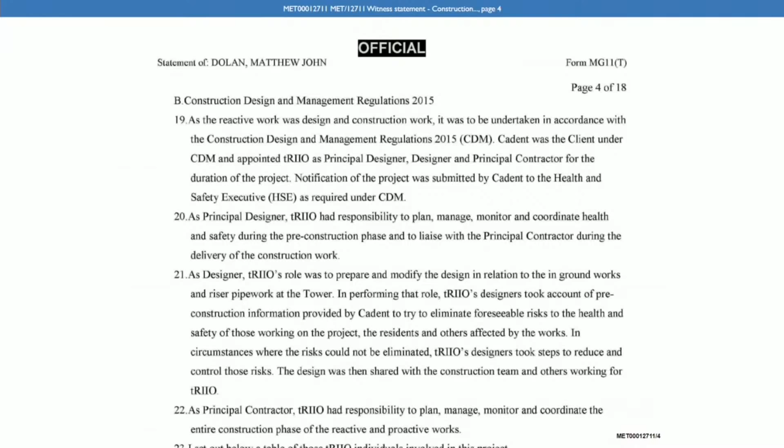So we know that the roles of principal designer and then designer, they're separate roles under the CDM regime, aren't they? Yes, they are. And the role of CDM designer is also distinct from any design role in the sense of having a contractual obligation to design. Is that correct? It is, yeah.

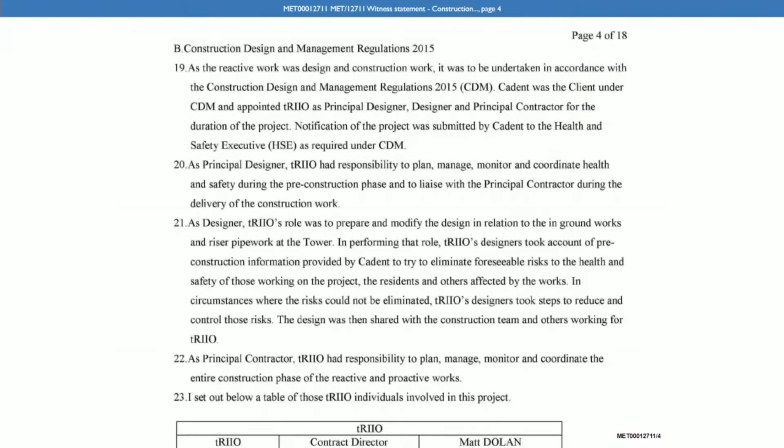And for the Grenfell project, Triio was both CDM designer as well as having the primary contractual role in designing the works under the contract with Cadent, yes? That's correct. And then, looking again at your first statement, paragraph 22, you tell us there that as principal contractor this time, Triio had responsibility to plan, manage, monitor and coordinate the entire construction phase of the reactive and proactive works. Is that correct? Yes, thank you.

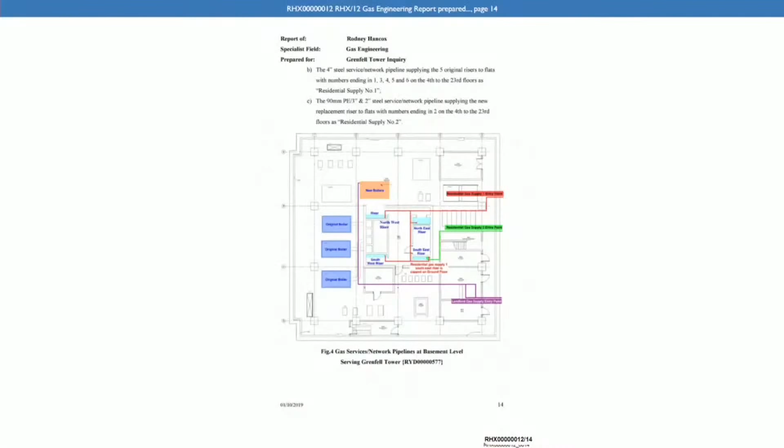Now, moving on to consider the gas installations at Grenfell Tower itself. We asked Mr. Harrison about the 3 different gas supplies into the tower yesterday, but I just want to confirm your understanding of those. If we go to RHX00000012 at page 14, this is figure 4 from Mr. Hancox's expert report, and it shows the 3 different gas supplies into the tower. At the bottom, we see in purple the landlord supply, which we understand feeds the boilers.

Now, it's right that Triio had nothing to do with that gas supply, did it? That's correct. And then we can see in red at the top, on the right-hand side, residential supply 1. Now, this was the original gas supply to the flats installed when Grenfell Tower was built. Is that correct? Yes. And we can see, if we follow the red line, that it comes into the basement and then divides into 4 risers, 1 for each of the 4 corners of the building.

Do you see that? I do. And was that your understanding at the time? Yes. And as it goes up, two of those risers split into two, so there are in fact six pipes going up, one into each of the six flats on each floor.

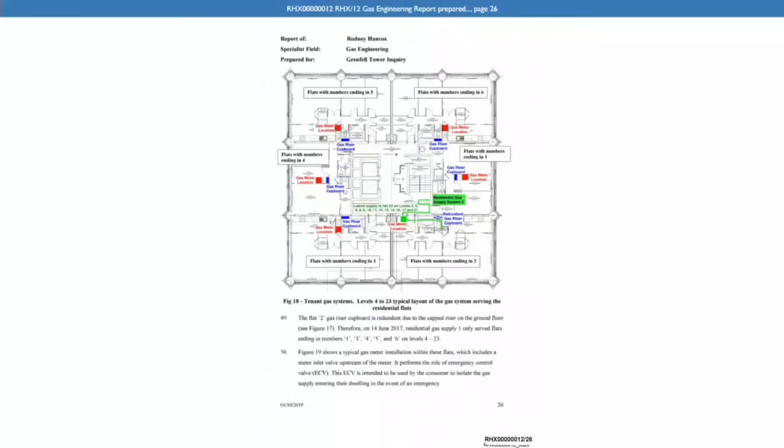Is that correct? That is correct. If we go to page 26 and look at figure 18, this is a typical floor plan at Grenfell Tower between levels 4 and 23. We can see in blue where the original gas riser cupboards were for residential supply 1. Do you see those? I do. Is it right that's where the meter was and the pipes would come from there to the gas appliances, the cookers? Yeah, so the riser would go up through the riser utility shaft into the flat, into the riser cupboard where the meter was.

Did Triio have anything to do with the work on residential supply 1? No.

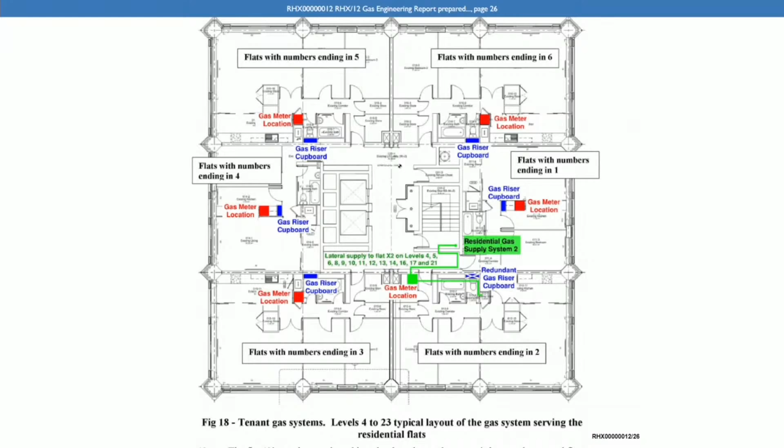If we go back to page 14 and look at figure 4 of Mr. Hancox's report, we see in the middle of the page on the right-hand side, with the green label and the green line, something called residential gas supply 2. That was the new gas supply riser that Triio installed in 2016 and 2017. Is that correct? It is. If we follow the green line, we can see it also comes into the basement and then comes to the southeast corner of the building. Is that correct? That's correct. From there, is it right that it rises up through the building, through the stairwell, and then into the lobbies and into the flats? Yes. We'll come to more detail about that shortly.

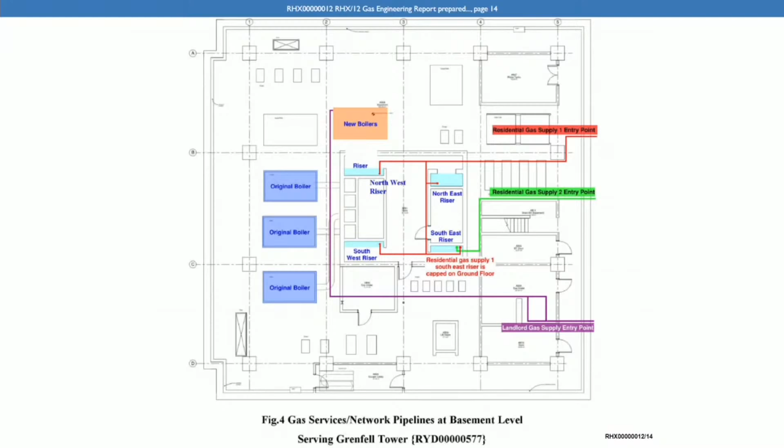In terms of the background to this riser, we heard from Mr. Harrison yesterday that as part of their rolling inspection programme, Cadent surveyed Grenfell Tower, and the surveyor identified a leak between flats 22 and 32, and a Cadent team cut the entire riser that served all of the flats ending in 2 to the tower, so the entire southeast corner was cut off from gas. Was that your understanding at the time Triio worked on the project? Yes. Did Triio have any involvement with that cutting and capping? None at all. And that was done by an emergency Cadent team, wasn't it? Yes.

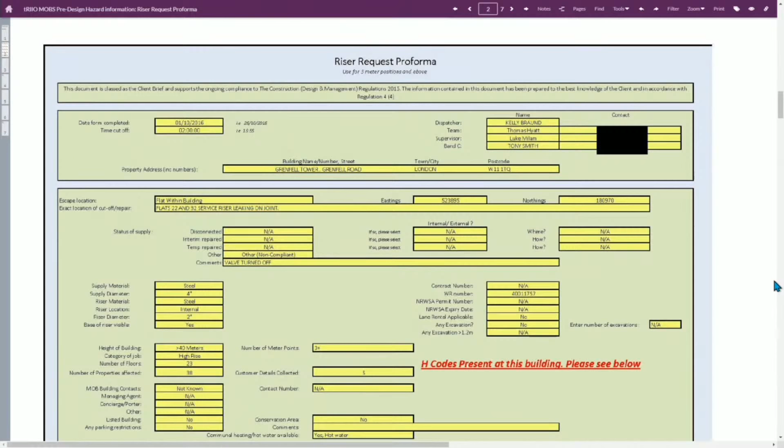And beneath that we see some details about the building. It says height of the building in excess of 40 metres, category of job high-rise, number of floors 23, number of properties affected 38. And then beneath that we see the flat numbers of the flats of customers that were believed at that time to be affected. And I think Mr. Harrison accepted yesterday that some of this may be inaccurate because some of these flats seem to end in a 1, not a 2, and it was only those ending in 2 that had their gas cut off. Is that right? That's right, yes.

And in that table we can see in the 4th column along from the left that there's something called vulnerability identified, and there's some information in there about vulnerabilities for some of the gas users. So, for example, you can see someone is said to have young children a few lines down. And in the 7th column, the far right column, there's also information about what appliances these residents used. Do you see that there? Yes, I do.

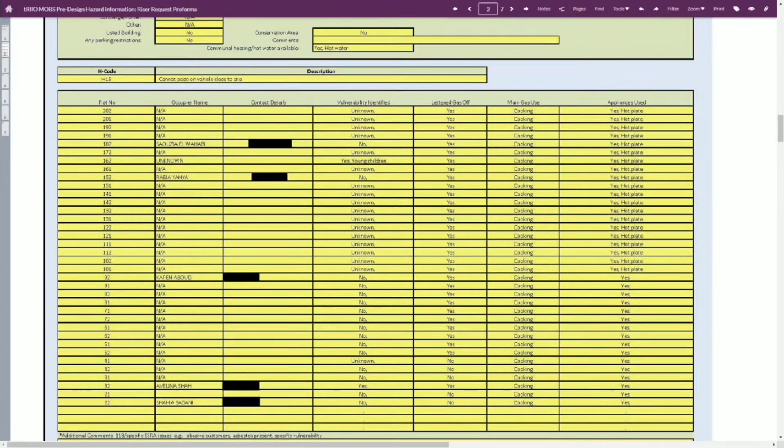And would this information be used and referred to throughout Triio's works? Yes, this is the document that's issued, as I mentioned earlier on, which is the client brief, and then this would be added to as the design and pre-construction process matures through the programming of the works. And just to confirm, was this all that Triio received by way of written instruction from Cadent on the work that you were to perform? Yes, this is the initial document that's sent through. Would you have expected more than this as an instruction to carry out such work? This was the agreed document, so this is what we would have expected to receive, yes.

And going back to the first page of this document - as we saw earlier, this is entitled Triio MOBS, Multi-Occupancy Buildings Pre-Design Hazard Information. And if we go to the bottom of this page we can see it's dated the 3rd of October 2016. Now, is it right that this was a document that Triio operatives would routinely fill out in order to brief Triio for works to be done on gas risers? Can I just ask to go back to the top of the document, please?

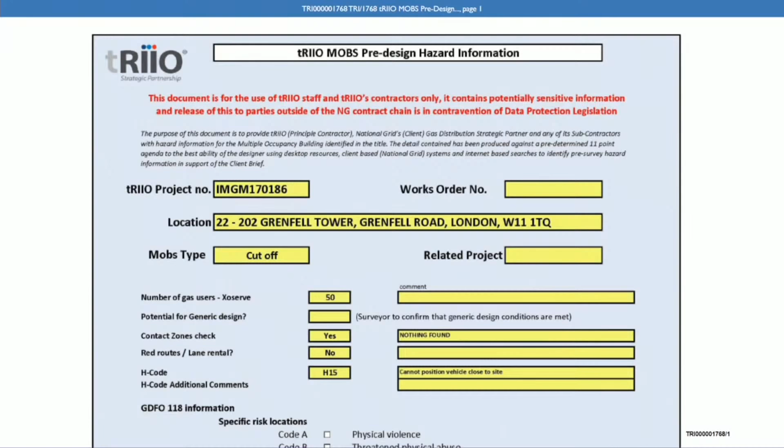Yes, thank you. In the middle of the page, in the first yellow box, further down there is a box for ESRI Vulnerable Customer Information. It's noted that a vulnerable customer is present with young children. We can see that there. And if we go to page 5 of this same document clip...

We can see that some data has been gathered about crime statistics. Based on data released by local police, the area around Lancaster West has a crime rate much lower than the regional average - this is a safe place to live, etc. So there's some data on crime statistics. Is that something Cadent provided to you, or that Triio would go and routinely gather? We would gather this information ourselves. We would run this report to understand the environment and location we were working in, and the hazard that crime could potentially present.

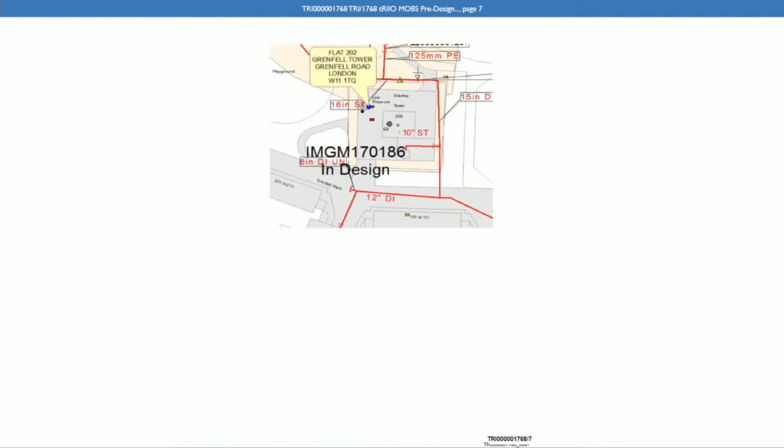And then on page 7 of this same clip, there's a map of the gas supply to Grenfell Tower. We have that there.

And we saw that the riser request pro forma was stated to be in accordance with the CDM regulations. That refers to one of Cadent's duties as client under the CDM regulations, which is the duty to provide pre-construction information. You're familiar with that? Yes, yep.

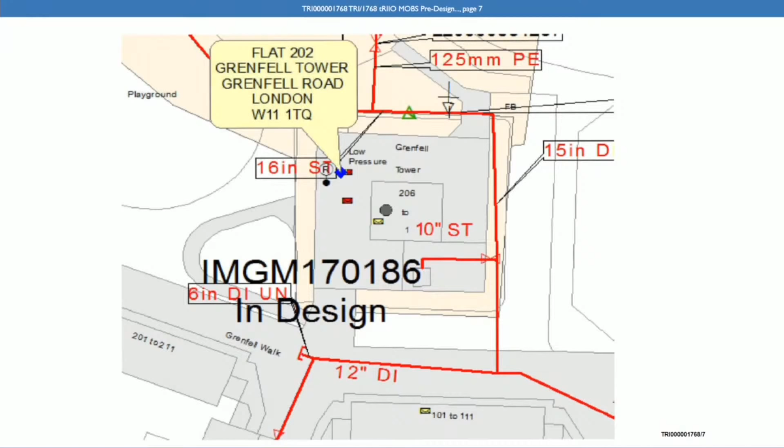One of the experts of the inquiry, Dr. Lane, has expressed the view that this riser request pro forma was not on its own sufficient to meet the requirement of pre-construction information. Would you agree with that? It was the initial document that was sent through, yes. I understand it was the initial document sent through, but in terms of what you would be looking for as pre-construction information from the client, was that document alone sufficient in your view, or would it need to be supplemented? It would need to be supplemented. Yes, thank you.

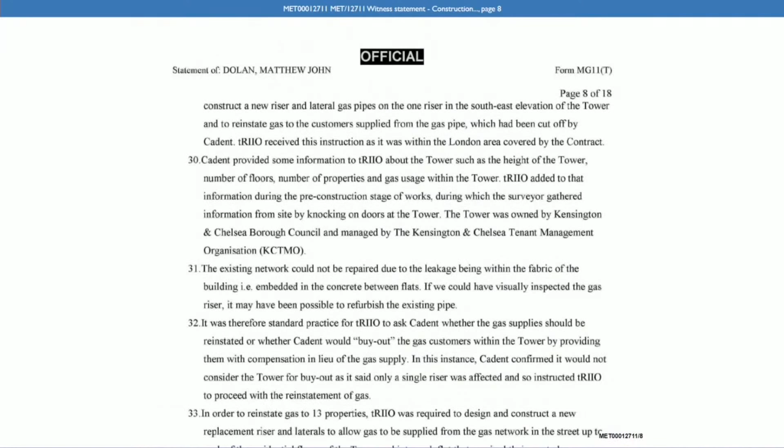And if we can go to your first witness statement again now, the Met statement, and look at page 8, paragraph 30, you say this: Cadent provided some information to Triio about the tower, such as the height of the tower, number of floors, number of properties, and gas usage within the tower. Triio added to that information during the pre-construction stage of works, during which the surveyor gathered information from site by knocking on doors at the tower. The tower was owned by Kensington and Chelsea Borough Council and managed by the TMO.

Now, was it typical for Triio to supplement the information given to it by Cadent by conducting further work on the ground, as you've described here? Yes.

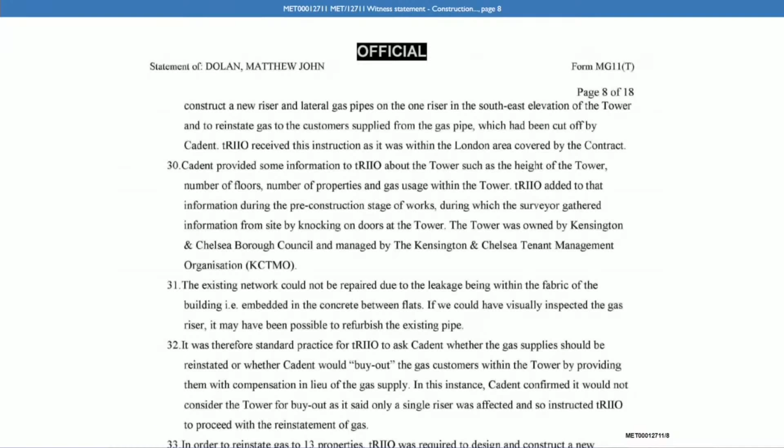And can you help us - what sort of information would Triio be seeking by knocking on doors, as you've explained? Location of the existing infrastructure, gas infrastructure within the building, potential locations for the new meter location, appliances, whether or not there was any additional information around vulnerable customers, the general layout of the property, and in the surveyor's experience, what might be of use in the design and construction of the replacement riser. Yes.

Was getting access to the flats a challenge at Grenfell Tower, do you know? Yes, like all blocks, getting access to properties is not an easy task. It needs to be worked out on a continual basis - it's not just one knock and get access, it is a continual process that you need to follow. And presumably that might be because people simply aren't in when your engineers are going round. That's correct. Or would sometimes people not be happy to let gas engineers into the flat? That could very well be the case.

And does that mean there might not be good or even complete data available to Triio when it was designing the riser? The information was added to during the life cycle of the project. So the information available at the time would have informed the design, and the design wouldn't progress unless it had the appropriate information to enable it to move on to the next stage.

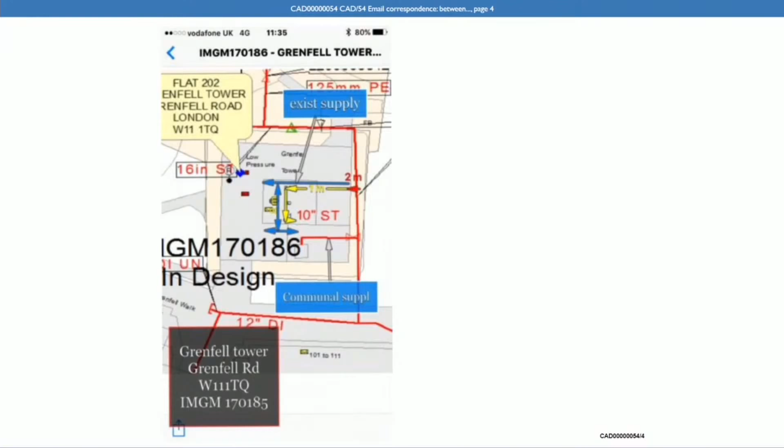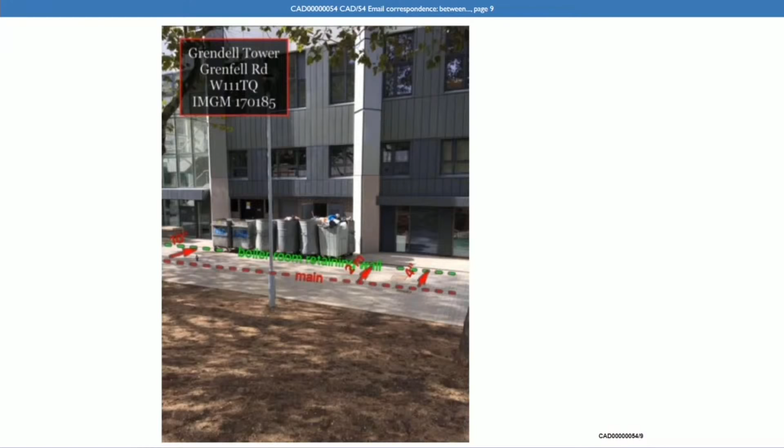Ah I see, sorry, that's a mistake in our notes. So is this just showing what the existing services are that are going in? Yes, the 10-inch is to the boiler landlord supply, and the 4-inch was to the existing 6 risers. Thank you.

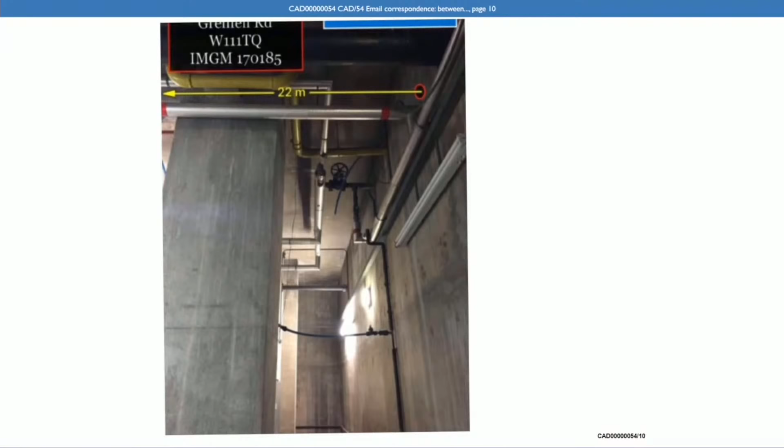If we go to page 10, we can see with these yellow lines he's showing how the service would come into the basement at around 5 metres high. Is that correct? It is, yes. Then page 12 shows us how it would come into the basement and then up through the ceiling of the basement. Is that correct? It is, yeah.

Page 13, then, this is where you were talking about service riser cupboards. We can see that he's suggesting that at ground and first floor level it would go through this service cupboard, is that correct? It is, yeah.

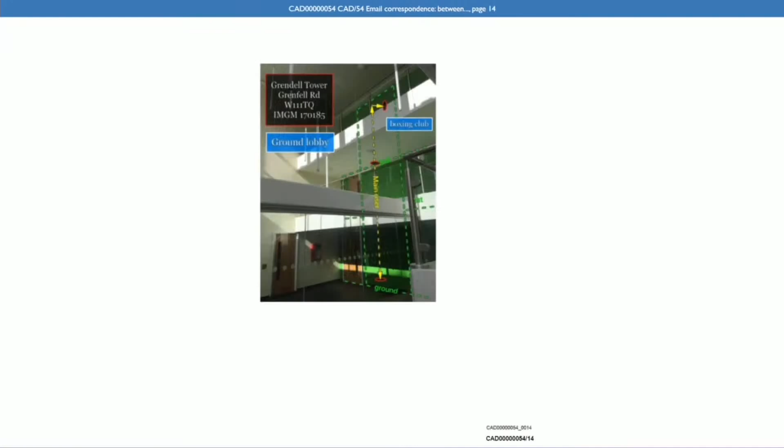And then at page 14, we can see how the riser would go through the main entrance lobby at Grenfell. Do you have that? I do. And again, that's the yellow dotted line, yes? Yeah.

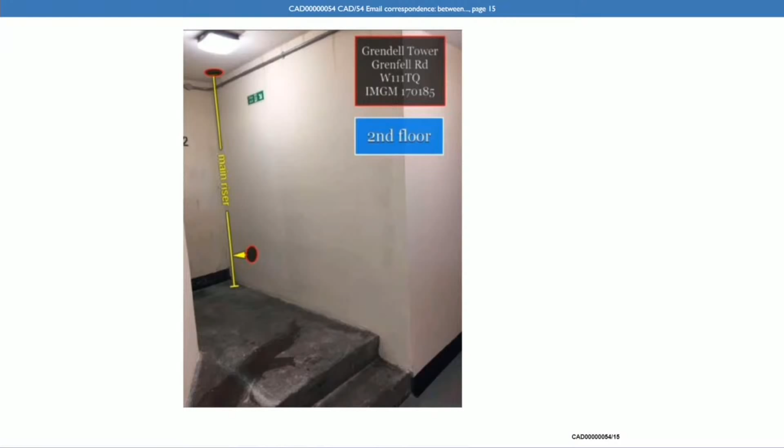At page 15, we see floor 2, the second floor, so it's coming through the floor of the stairs, having gone through that atrium, and then it's rising into the stairs and starting to travel through the stair shaft. Is that correct? Yes. On the previous picture, the riser that we installed.

Let's go back to that picture. Do you want to explain? That riser through the 2 floors before it entered into the stairwell, as you just seen, they were the riser cupboards. So there was a riser cupboard as it came out of the basement, with a louvered door. Then there was a similar scenario set up above that where it went into a storeroom, and then it went into the stairwell.

I see, so it's not actually going through the lobby like this. It doesn't actually go through there, no, it's going behind where we're seeing, through a series of cupboards and other riser cupboards. Yeah, that's correct. Thank you for that.

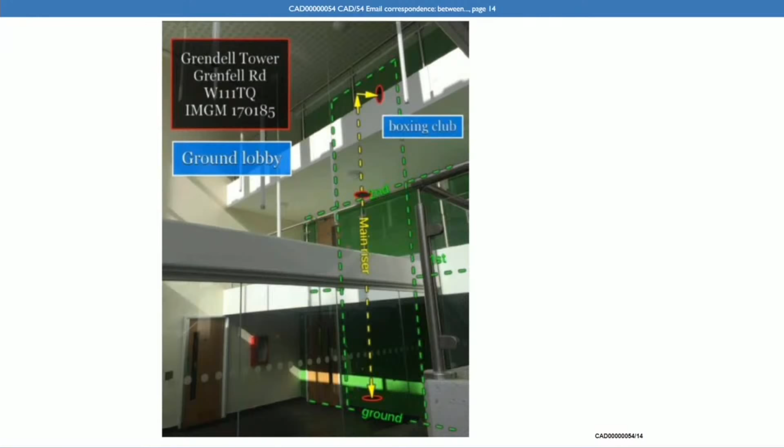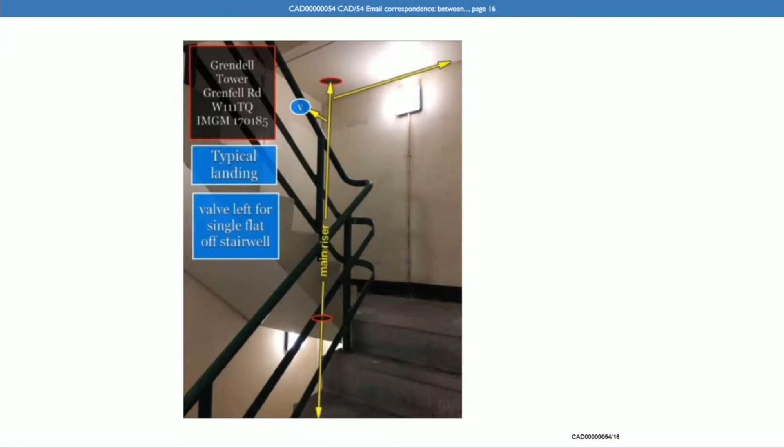And then if we go to page 16, we can see he's explaining how it would go up through the stairs, and at the top it would go through the ceilings of the stairs. He's also starting to show how lateral pipes would branch off to start to serve each floor. Is that correct? It is, yes.

If we look at page 17 now, this shows the view from the communal lobby at levels 4 to 23. Is it right that the pipe comes in through the left and then snakes round the top of the wall, under the ceiling, and then across to the flat? Is that correct? Yes, thank you.

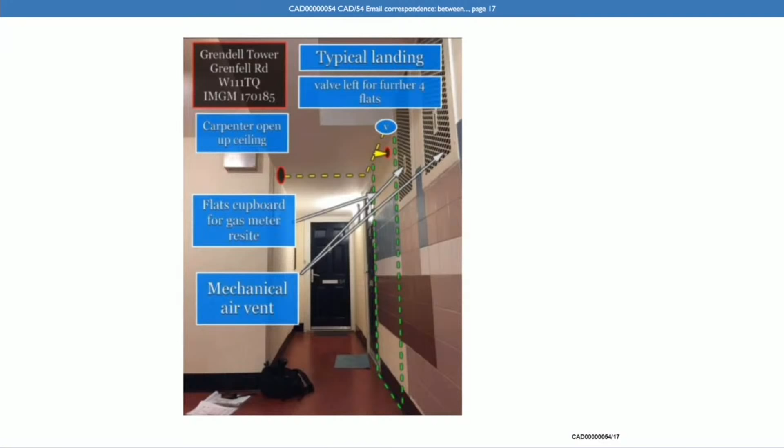And then just a few pictures to show how the riser was actually built, because this also helps to explain the position that it went into. If we could go to CAD 401640.

Sorry, if we just rotate that picture. Now we can see the as-built picture, this is the pipe work. What we haven't got, and we'll come to it later, is the boxing in at this point. But am I right that this is how the pipe itself was built, coming out of the stairs at the wall to the left, passing round just underneath the ceiling, and then down and through to the flats? It is. And it wasn't all flats, was it? It was only some of them who needed gas, 13 of the 20 flats needed gas. Yes, thank you.

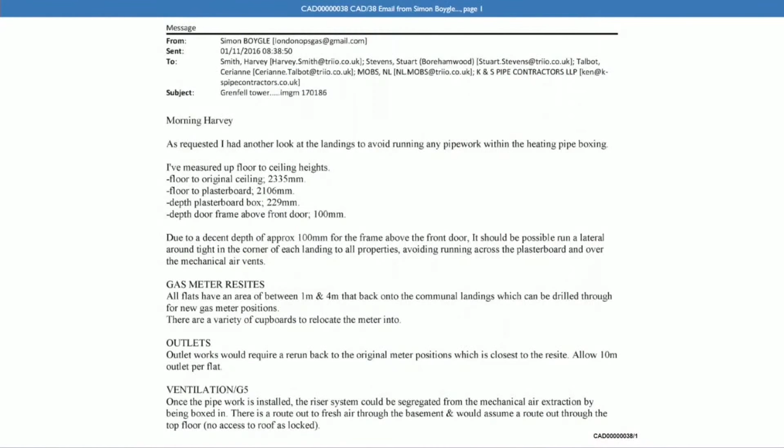This is an email he sends on the 1st of November 2016, again to Triio and a number of its subcontractors. He says, 'Morning, Harvey. As requested, I've had another look at the landings to avoid running any pipework within the heating pipe boxing,' and gives a number of measurements he's carried out.

Then under the heading gas meter resites, he says: 'All flats have an area of between 1 metre and 4 metres that back onto the communal landings, which can be drilled through for new gas meter positions. There are a variety of cupboards to relocate the meter into.'

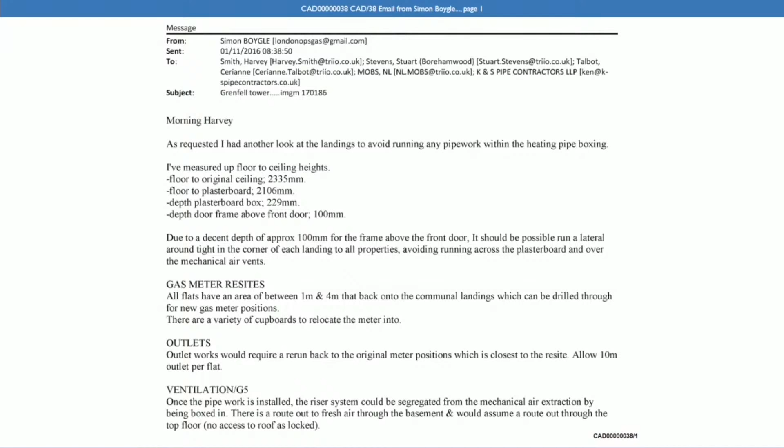Was it necessary to move the gas meters within flats closer to where the pipework entered? Yes, there are restrictions on the length of pipe that can be run inside a residential property, that length being 2 metres. To get back to the original meter locations we'd have had to lay pipe at a greater length than 2 metres and introduce fittings, which isn't allowed under the specifications we work to. So we had to find a location for the meter within that 2 metre maximum length.

So they're effectively within 2 metres of the front door, moved from the kitchen cupboards to being by the front door. Is that correct? There is a room next to the hallway as you come through the front door, and that's where the meter was relocated. Yes, and I'll take you to some pictures of that in due course.

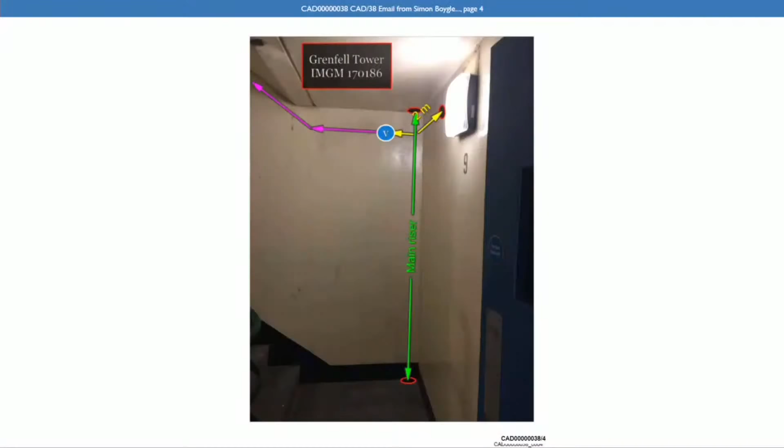Simon Boygle attaches some more marked up photographs to this second survey, illustrating how he proposed the proactive works to be installed, i.e. the works later to extend the riser to serve more flats. This is within the same document, page 4. Is it right that the pink arrows going to the left are showing how the riser would be extended in that direction in the stairs?

I'm not sure with that photo. If that was the extension of the riser in the stairwell to get a pipe to lay into a separate floor... my recollection was that we'd branch off the pipe on the green with the yellow into the communal landings, and the pipe would go off to the right and then to all of the landings. So you can't help us with what he's showing in pink? I'm not 100% sure, but my engineering judgment is that the pink arrows might be to go to the flats ending in 1, and for all the other flats it goes to the very right. That could well be, yes.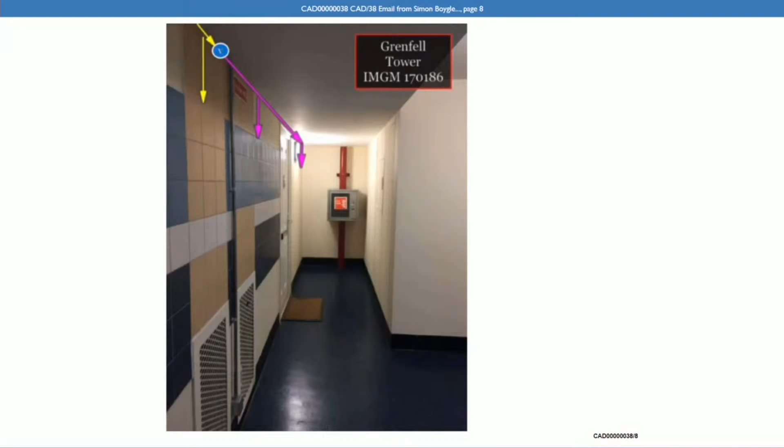If we go to page 8 of this clip, we can see with the pink arrows how he's showing the riser would be extended within the lobbies to service other flats. Is that correct? That is right, yes, those are the laterals branching into each of the flats. And at page 11 we can also see something similar being shown, another view of that.

Would the tRIIO designers have received all this information from Mr Boygle following his surveys? Yes, we'd have understood the number of flats on each floor, the gas loading requirements of each customer, and used that to design the size of pipe required. Would they have examined this proposed route themselves, or just taken what Mr Boygle said? They would have asked the question, and would have asked for alternative routes, though whether Simon could find one I'm not sure. That survey information enabled the designers to extend the reactive works to the flats that would have been part of the planned proactive works.

And thinking about both surveys that Mr. Boygle did, the first showing the route of the new riser and the second showing more about the proactive works, was it the responsibility of the tRIIO designers to evaluate the safety and compliance of those routes themselves? It was, yes. So they couldn't just rely on Mr. Boygle's surveying work. They had to ask themselves separately whether it was a safe and compliant route to follow, is that correct? Absolutely, yes.

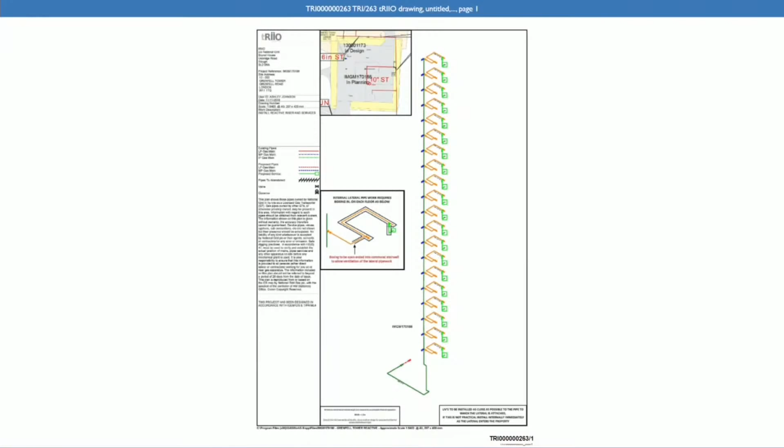So this is a drawing, and it's also got some little inserts, including with the map, of the first design that was come up with for this work. On the left-hand side, in the third box down, we get the date. It's dated the 11th of November 2016. You can see the user ID, Ashley Johnson. Who was Ashley Johnson? Ashley was a design analyst, or is a design analyst. And the date is the 11th of November 2016.

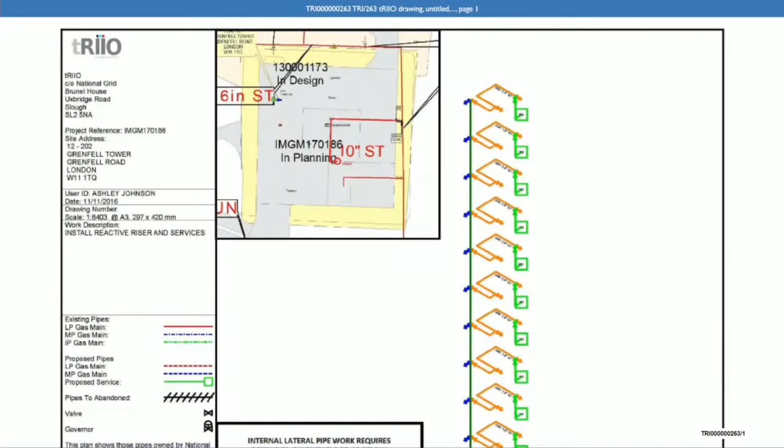It says in the bottom third of the page, bottom text in the left-hand column, that this project has been designed in accordance with IGEM G5 and tPRML4. What was tPRML4? That is the Cadent main laying procedure, so any gas pipe relates to the in-ground pipe. So the in-ground pipe would have been designed to ML4 requirements and the riser system to G5.

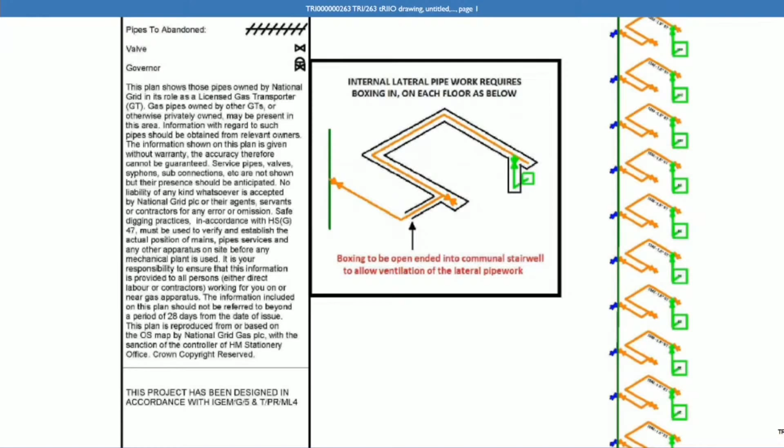At the very bottom of this page we can see a web address, a URL for this document, right at the bottom, and there's reference there to something called Gasworks 9. You tell us in your first statement that the project was designed using this software, is that correct? In terms of design, Gasworks 9 would be used to size the riser system. It would take the length of the pipe required, it would take the gas usage required, and use those two component parts to determine the size of the pipe required for that particular building. Yes, so in the context of the design, that's what that means.

And just to be clear, that's gas modelling software, is that correct? Yeah, it models using hydraulic analysis. And does it model pressure drop, velocity, gas demand, size of pipe? It does, yes. And just to be clear, it doesn't assist with considering other technical compliance issues like ventilation or compartmentation breaches, does it? No, it doesn't, no.

So if we look at the drawing itself, we can see at the bottom there we've got that little red dotted line. Is that the gas main into the building? That would be the inlet pipe, the 90 mil. And a new service pipe had to be built underground for this supply, didn't it? It did. And the red bow-shaped symbol, is that an isolation valve? Yeah, that's a pipeline isolation valve known as a PIV.

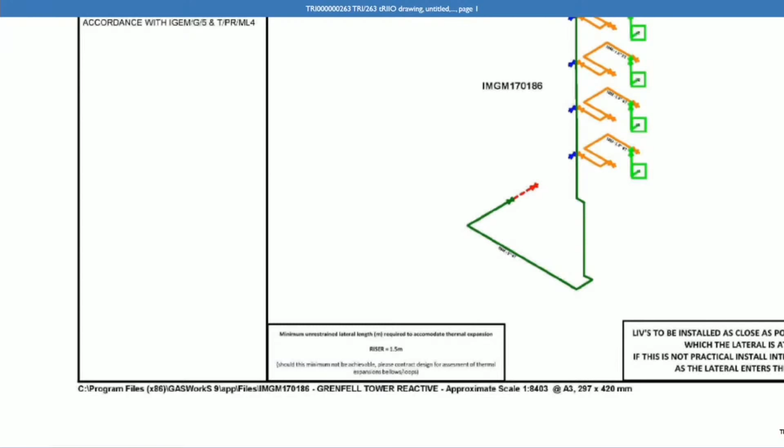And then the dark green pipe goes through the basement and up, and we can see a little blue symbol then at each floor. Perhaps if we can now pan out of the drawing. Now, that little blue symbol at each floor, does that indicate the valve that was there when the proactive design was going to be put in? It's very difficult to say on this drawing. I just want to clarify that would be to extend the proactive works.

And then on each floor we can see a yellow pipe that's coming out and going round through the stairs into the lobby and round the outside of the lobby, is that right? That's showing the laterals. And then the bright green box on each floor, is that where it enters each individual flat? That's on this particular drawing. This is entering the flats ending in 2.

Just to be clear, this is the design for the first phase of your work. Yeah. And we can see the drawing finishes at the top with the laterals on floor 23. Is it right that the intention was the pipes would finish at floor 23 and then take advantage of the natural ventilation provided by the roof vent? Yes, that's right. Now just looking at the little inset drawing in the middle of the page, if we could blow that up.

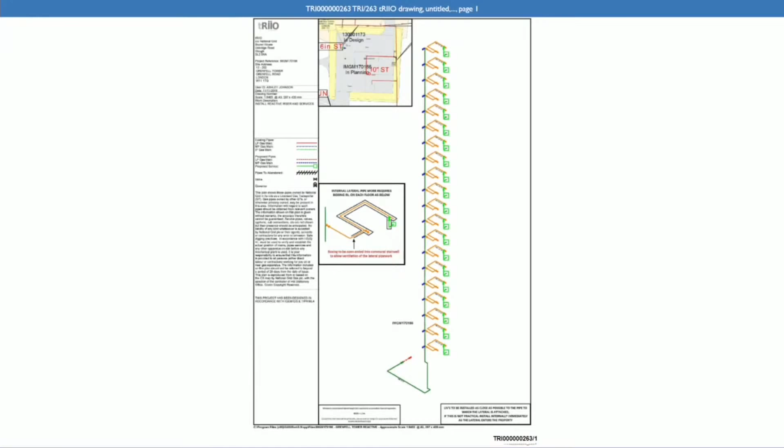The drawing, that's it, thank you. So this is headed: internal lateral pipe work requires boxing in on each floor as below. So it's showing us the boxing in plan.

As we understand it, is it right that the dark green pipe on the left is the riser coming up through the stairs? Yes. And the yellow pipes are the laterals that then go through the stair wall and into people's flats? Yes. And the hard black line around some of those laterals shows the boxing in.

Now, is it right, and this is important, that in this particular design, the boxing in is only on the communal lobby side where the pipes were to be boxed in completely? Yes, so as the pipe went through the wall from the stairwell into the communal lobby, on that side of the wall the extent of the pipe in the lobby would have been boxed in. So once it's in the lobby, it's got its own little compartment around it. But when it's in the stairs, according to this first design, the pipe was going to be naked.

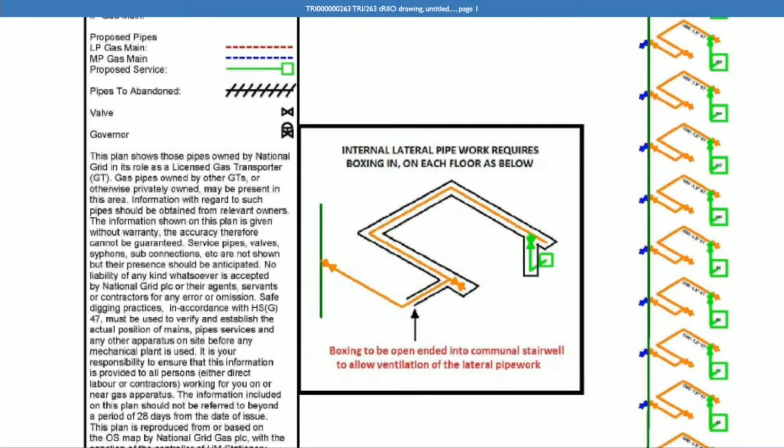Is that correct? Yes, it would be segregated from this for ventilation purposes because of the mechanical ventilation that I referenced earlier. So we segregated this pipe from the lobbies where the mechanical ventilation was, and it in effect became part of the stairwell. It was open-ended into the stairwell. Yes, thank you.

And so there'd be oversized holes around the pipe as it goes into the lobby? That's right, yes. To allow a free flow of ventilation from the boxing in back into the stairwell? Yes, correct.

And the stairwell itself would, this is the intention, provide the natural ventilation to the riser itself? Yeah, so for design 1, there was ventilation at roof level. And I think it's important to note that the pipe in the stairwell in design 1 was a welded system. So direct ventilation was available at the roof vent, and at the bottom of the stairwell we had indirect ventilation, which was the door movement, air movement resulting from the door into the stairwell. So we had indirect ventilation at the bottom of the stairwell and direct ventilation at the top. Right, and that was the design that was produced in design 1.

And then the red text at the bottom of this inset drawing says boxing to be open-ended into the communal stairwell to allow ventilation of the lateral pipework. That's what we were just discussing, yeah. That is it, yes.

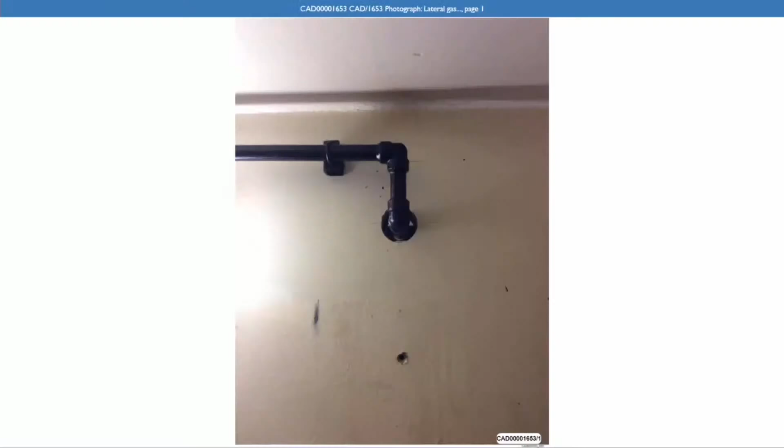And it's there for ventilation purposes. It's there to vent, yes, for the laterals, yeah.

So this design did require the compartment between the stair and the lobbies to be breached to ensure that the gas pipes could be ventilated. That's right, isn't it? It is.

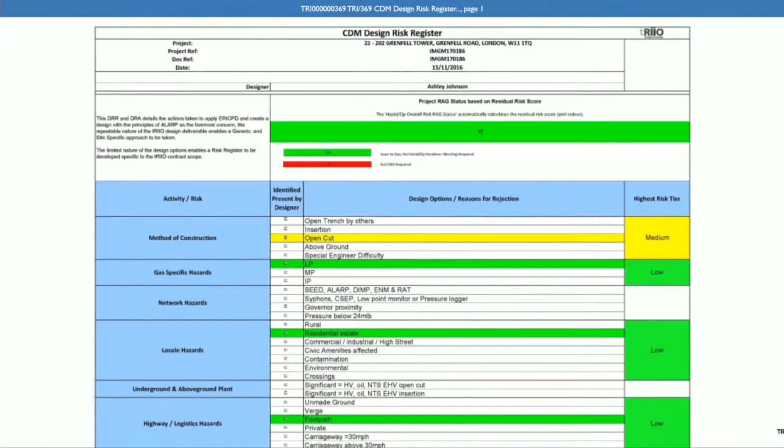Now, can we look at the design risk register that tRIIO completed in relation to this design? At the top, we can see this is called a CDM Design Risk Register. Beneath that, we can see it's dated the 15th of November 2016. And below that, we can see the designer's name, Ashley Johnson, and just below that, it says Project RAG status based on residual risk score.

Can you just help us with what does RAG, R-A-G, stand for? So very simply, in terms of RAG: red, amber, green. Red being higher risk than amber, amber being higher risk than green.

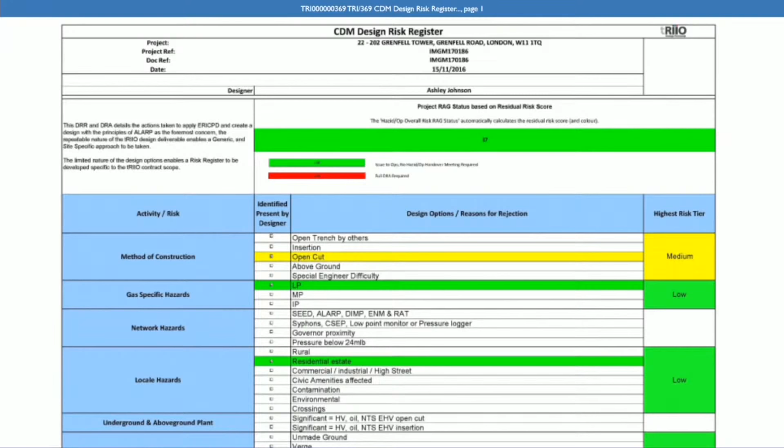And then we can see below that, highlighted in green, the score for this assessment is 17. Is that right? Yeah. And the significance of that can be seen by looking at the key beneath that: if it's less than 18, the wording says issue to ops, no hazard, ops handover meeting required. And then in red, what it says is if it's greater than or equal to 18, full DRA required.

Is that right? That is right, yes. And what does a full DRA mean? So a DRA stands for a design risk assessment. It may help if I explain the process.

Yes, please do. The design team within tRIIO designed MOBS projects, but also designed mains replacement projects and various other activities required under the contract. Every project went through the design risk register process, and it was those projects deemed to have a higher level of risk after going through that process whereby a more detailed design risk assessment would be undertaken. In this instance, for Design 1, the risk was felt at that time to be sufficiently low not to require a design risk assessment.

Yes, thank you. And so because the score came to 17 in this instance, there was no need to consider any further risks in this design. Is that correct? That's right, yes.

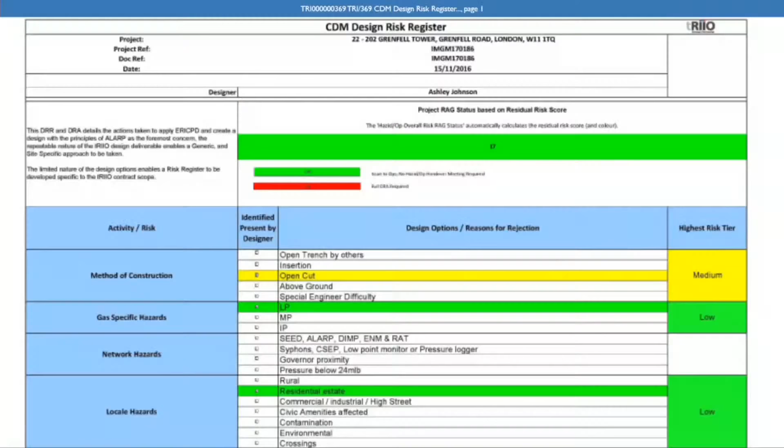If we go to the bottom of the page, we can also see a box that says manual DRA override needed. Do you see that? Yes. What does that mean? The design risk register requires information to be input and a score is generated from the system itself. Now, if the designer, for example, the score comes out at 10, but the designer feels that a design risk assessment is required, he can override that and go to the full design risk assessment.

So it's a human being countenancing what's happened with the system. Yes, there's a security level in effect. And in this case, it looks like the designer did not manually override the process and go on to do a full design risk assessment. Is that correct? It is, yes.

Let's just have a quick look to see what would have been considered had that DRA process been triggered. If we can go to TRI00001218. This is the design risk assessment conducted later in March 2017. We're going to come to that in due course and see there was a second design risk assessment process. But just for the moment, I want to see what would have had to be considered if this DRA process had been triggered. If we can go to page 4 of this document.

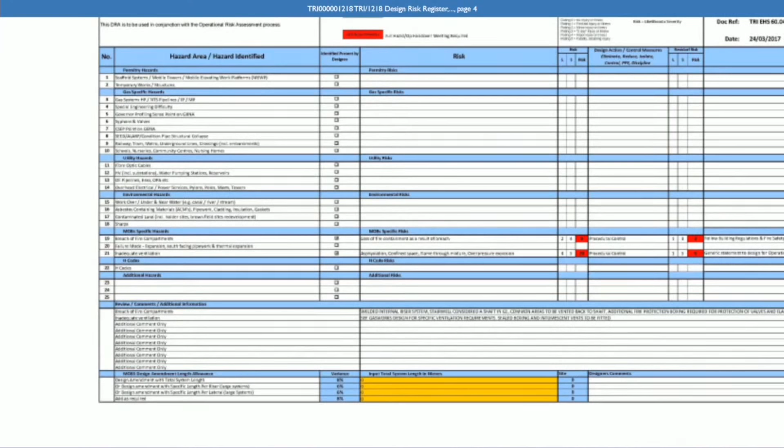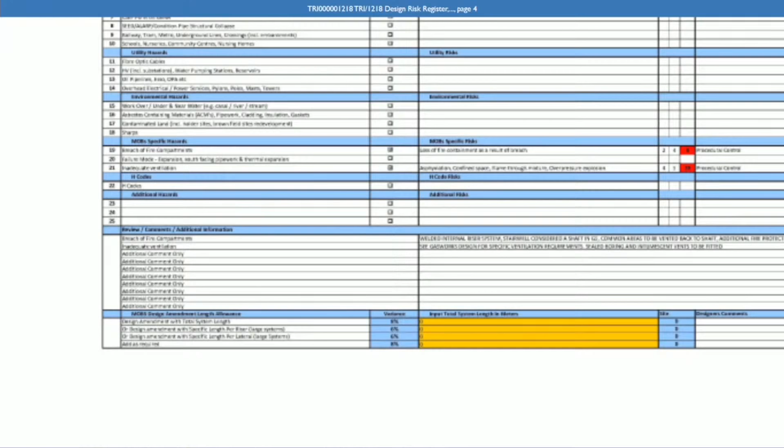Towards the bottom of the table, again it's very tiny writing. If we could blow up items 19, 20 and 21, what we get is in the header in blue, it says MOBs specific hazards. So as I understand it, these are specific hazards which might arise in multi-occupancy buildings. Is that correct? Yes. And beneath that we've got three items that are asked to be considered.

That's better, thank you very much. We can see 19 is breach of fire compartments. 20, failure mode expansion, south-facing pipework and thermal expansion - so that's about expansion of pipework. And 21 is inadequate ventilation. Do you see those three matters there? Yes.

So it's right that those three items are only considered if there is a design risk assessment process. Is that correct? It is, yes. So unless someone's manually overridden it, or unless the score is high enough, these questions are not asked at the design risk assessment process. Is that correct? Yes, they're not. They wouldn't have been in this instance.

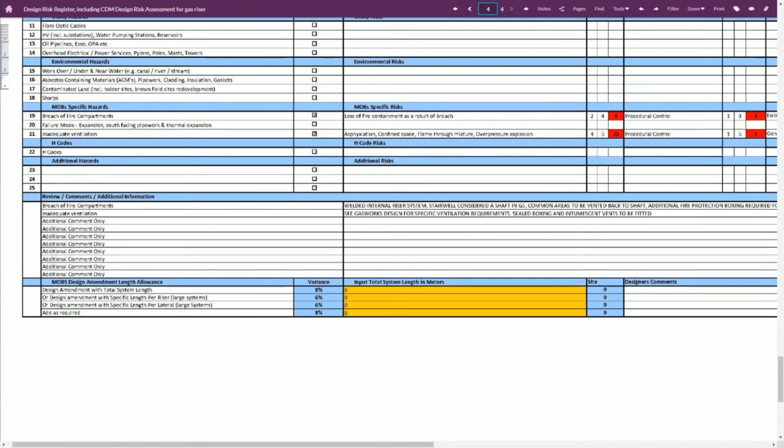Now, can we agree that replacing the gas supply to Grenfell Tower did involve breaching of fire compartments? It did, yes. And pretty important fire compartments, weren't they? Yes, as in the stairs, a single stair. Yes. And through to the communal lobbies for flats. And it also involved, can we agree, a complex ventilation strategy? Yes.

And so can we take it from this that the tRIIO designer did not specifically consider these features in any detail when the initial design was created? They considered the breach of the fire compartments in terms of boxing in. The boxing in was fire rated, but it wasn't part of the design risk assessment process. It wasn't formally documented under this process.

That's correct. Can you help us as to why not? Why, given what you've just accepted, that this was breaching important fire compartments, it was a complex ventilation strategy, can you account for why a tRIIO designer didn't manually override so that those specific risks were considered? I can't provide an explanation as to why the designer at that point did not manually override that design risk register. Looking back on this now, do you agree that those features, breach of compartmentation, ventilation, should have been the subject of a detailed design risk assessment? I do, yes.

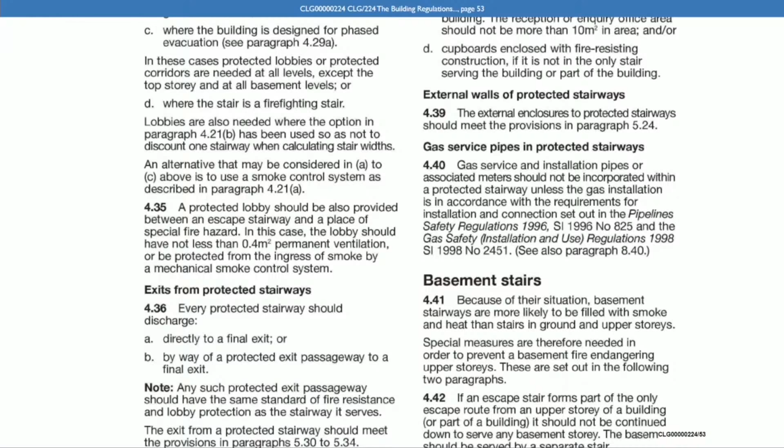We can see on the right-hand column, paragraph 4.40, headed 'gas service pipes in protected stairways.' It says gas service and installation pipes or associated meters should not be incorporated within a protected stairway unless the gas installation is in accordance with the requirements for installation and connection set out in the Pipelines Safety Regulations 1996 and the Gas Safety Installation and Use Regulations 1998. In other words, is it right that this appears to say you can build a gas riser in a protected stair, but it has to meet other technical requirements of a gas riser in those other regulations? That's what that says, yes.

Were you aware of this provision within Approved Document B at the time? I wasn't personally. Would you expect, as you mentioned before, that your designers wouldn't have been particularly familiar with Approved Document B? No, they wouldn't have been. They would have been using IGEM G5 as the main document in producing that design, on the understanding that by complying with G5, these other regulations relating to the work would have been satisfied. So does it follow that you wouldn't have expected the tRIIO designers to be aware of this particular part of Approved Document B? That's correct, yes. Would you expect a tRIIO designer to know the difference between a protected stair and a firefighting stair? Not necessarily.

As far as you are aware, was there any further consideration about whether putting the riser in the stair was acceptable? For example, did tRIIO consider asking the TMO to check with the London Fire Brigade if that was acceptable? We didn't specifically ask that it be checked with the London Fire Brigade, but the design was sent through to the TMO, and the TMO approved that design and the commencement of the project. There was dialogue and email traffic between our design team and the TMO regarding the design and whether it would be acceptable from the TMO's perspective.

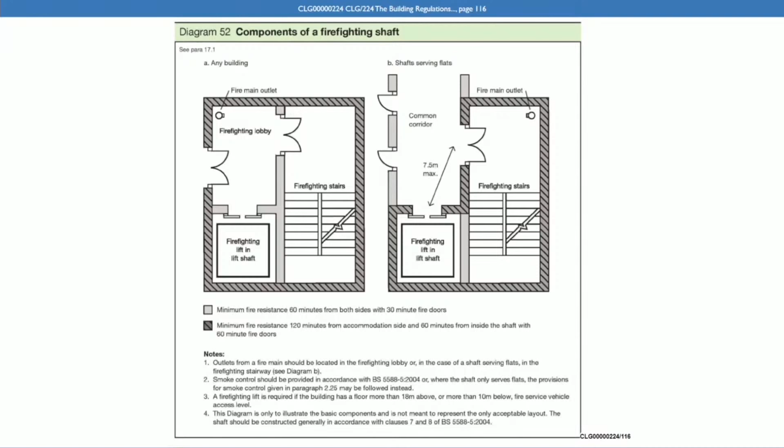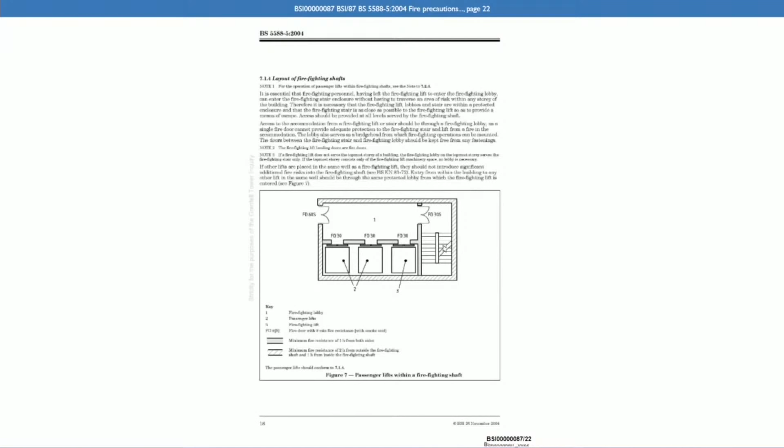We can see the title is Fire Precautions in the Design, Construction and Use of Buildings, Part 5, Access and Facilities for Firefighting. If we go to page 23, this section actually starts on page 22. If we go back one page, yes, there's a section here, 7.1.4, layout of firefighting shafts.

If we go over the page within this section and look at the third paragraph down, we see it says: goods lifts and service lifts should not be located within firefighting shafts. Only services associated with the firefighting shaft should pass through or be contained within it. A firefighting shaft should not contain any cupboards or provide access to service shafts serving the remainder of the building. Do you see that? Yes.

Can we agree that the practical effect of that is that if the stairwell at Grenfell Tower was a firefighting shaft, then there should not have been a gas riser in it? In terms of this document, yes. In 2016, is that something that tRIIO and its designers understood? No.

I just want to focus now on some of the ventilation aspects of the first design. If we can go back to Approved Document B, this is CLG00000224, and look now at page 81. This is within the B3 section, about internal fire spread, which includes provisions about compartmentation.

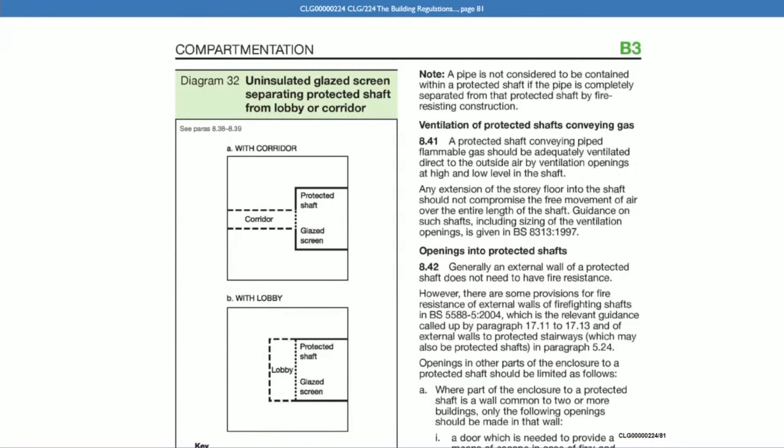Now, can we agree in simple terms a gas supply needs to be adequately ventilated at the top and at the bottom of the shaft? Yes. And you've already mentioned that it really needs to ventilate naturally - there are all sorts of problems with mechanical ventilation. There's a difference between mechanical ventilation, direct ventilation, and indirect ventilation.

In the context of the riser that was put in the stairwell, design one was a welded system, and G5, the spec the designers used to design that riser system, ensured there was direct or indirect ventilation at the top and bottom. The top had direct ventilation through the roof vent, and at the bottom there was a door onto the atrium landing, and then the front doors - it's the door movements and air movement over 30 minutes which would have satisfied the indirect ventilation at the bottom. That's how the design was produced.

But is it right that that would have to rely upon the riser being welded steel? Absolutely, yes, correct. Now, looking at that paragraph 8.41 again, just to be clear, I think from what you've said, you wouldn't have expected the tRIIO designers to have known about that provision at the time they were designing the Grenfell Tower riser. That's correct.

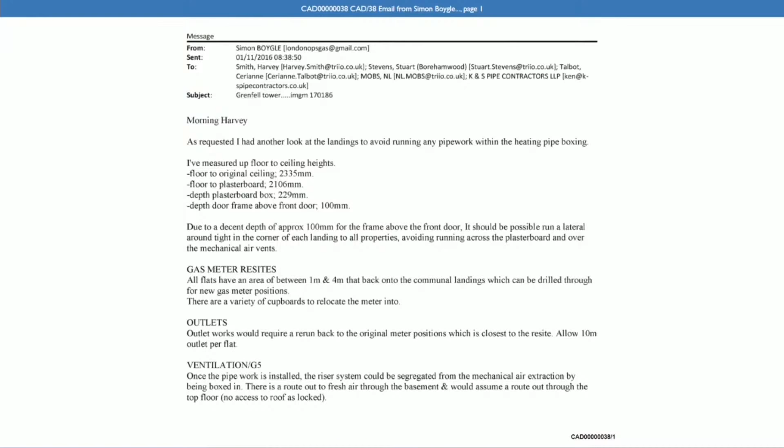Was it acceptable in your view for the tRIIO designers to have relied on that statement by Simon Boygle as having given sufficient consideration to the ventilation question for the pipework? No, it's the designer's responsibility to produce the design and the ventilation requirements.

So is it right that you would have expected them, the tRIIO designers, to have given separate consideration to the ventilation aspects of this new riser design? Yes. Do you know if they did, in fact, give separate consideration to those ventilation aspects?

In terms of the design, they would have done in terms of what the resultant design was around—I explained that earlier on in terms of roof access and the door movement. Simon talks about a route to the basement there. The design required a door movement at the bottom of the stairwell, going into the atrium level to the front door, which is what the designers ended up with. So while Simon mentioned the basement, in terms of that iterative process of producing the design, it was the indirect ventilation that was available, or was part of the end design that the designers produced.

Now, we have not seen any evidence, any written evidence, that tRIIO gave more consideration to ventilation, and in particular to the ventilation in the route between the basement and the stairs. Can you help us as to why we don't see that in any of the design documentation? I don't think anything was documented in terms of the decision, the thought process that they went through.

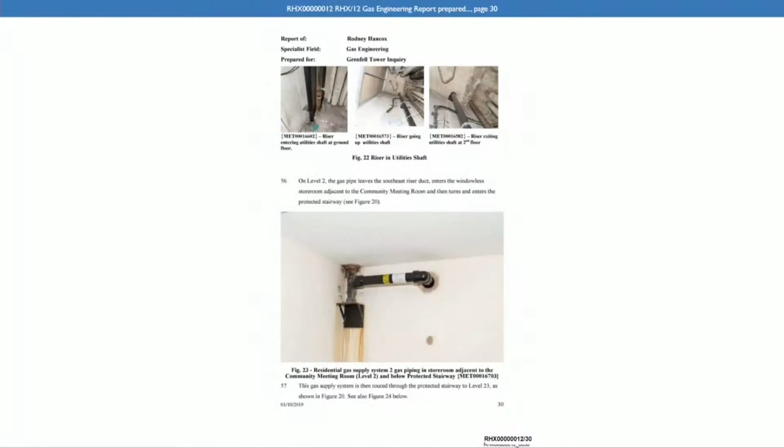These images at the top of the page show the riser going - this is the area between the basement and the lower part of the stair. On the left, the riser enters the utilities shaft at ground floor, then goes up the shaft, and exits it at second floor. And you're saying there was ventilation in these spaces because there were doors onto these spaces?

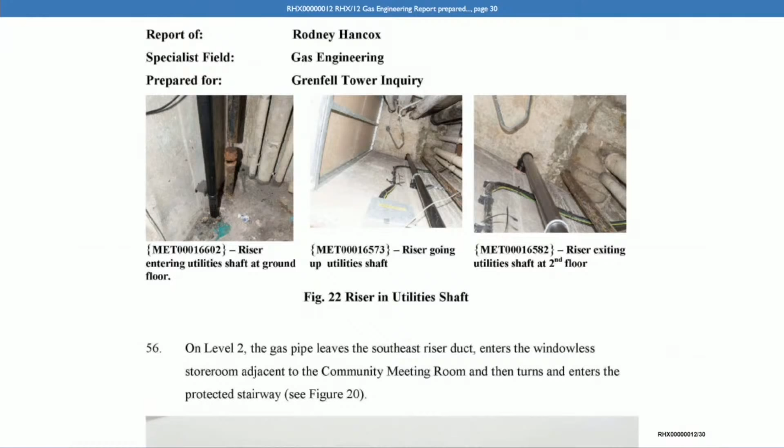Yeah, there were doors onto these spaces that had louvers in the riser cupboards. So the two riser cupboards shown there had doors with louvers on. And even though it's not documented in the design, that's how this ventilation was supposed to work - that was the intent of the design in terms of ventilation.

Can you help us as to why we don't see any calculations carried out in relation to the ventilation, suggesting that this design was going to be adequate in terms of the ventilation it provided? At the time, there were no calculations that supported that design. Should there have been? Yes, there should have been. And that was an omission in the design process. Yeah.

Now, in terms of compartmentation, I just want to look at some discussions that occurred about breaching the stair wall into the lobby. If we can go to TMO 00833-486.

This is an email chain between Charlie Saul at the TMO - we saw before that he was the contact point at the TMO on this issue - and Harvey Smith of tRIIO, and also Martin Wiskin, the designer, is copied in. And Harvey Smith was the project manager, that's correct.

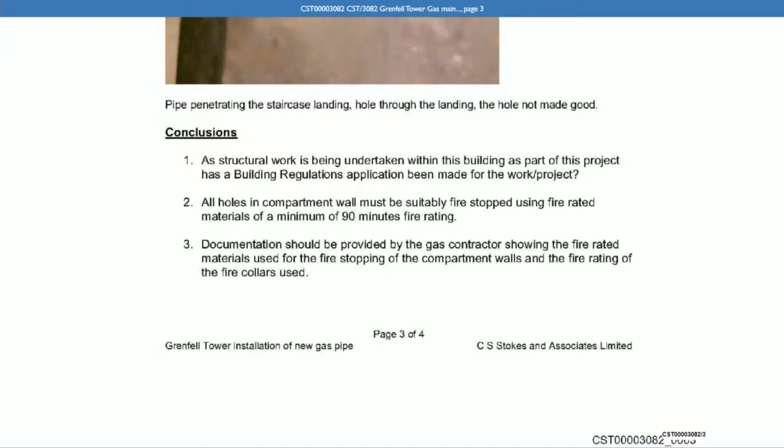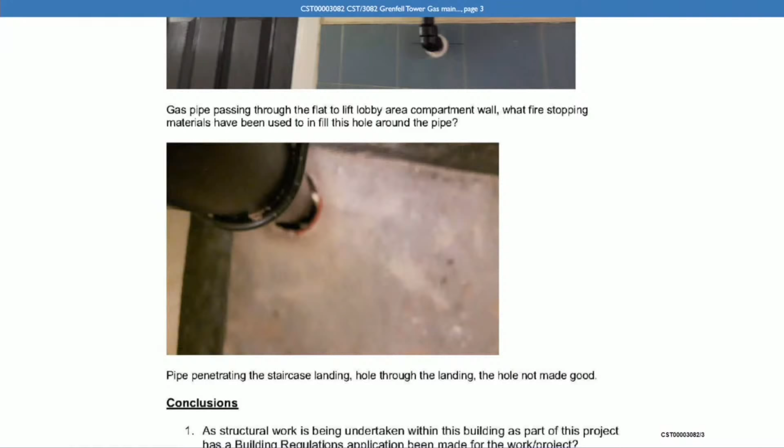And can you see above that is a picture? We scroll up. He's got pipe penetrating the staircase landing, hole through the landing, hole not made good. And then above that, he's got gas pipe passing through the flat to lift lobby area compartment wall. What fire stopping materials have been used to infill this hole around the pipe?

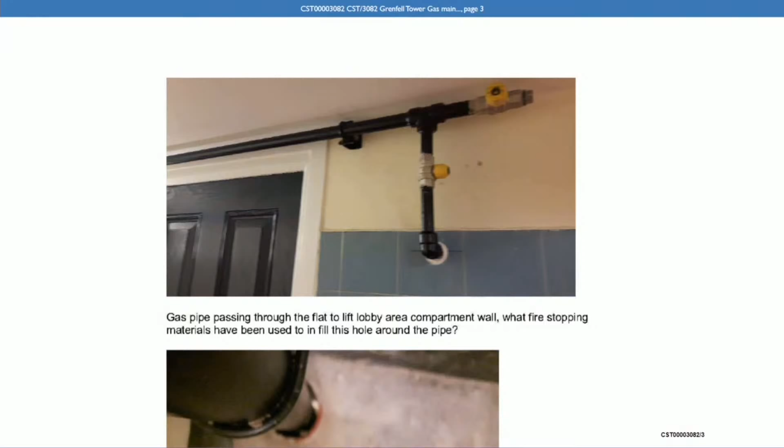Now, just looking at what Carl Stokes says at point 2 of his conclusions, he says all holes in compartment wall must be suitably fire stopped using fire rated materials. He doesn't distinguish there, does he, between the holes between the lobby and the flats and the holes between the stair and the lobby? Yes.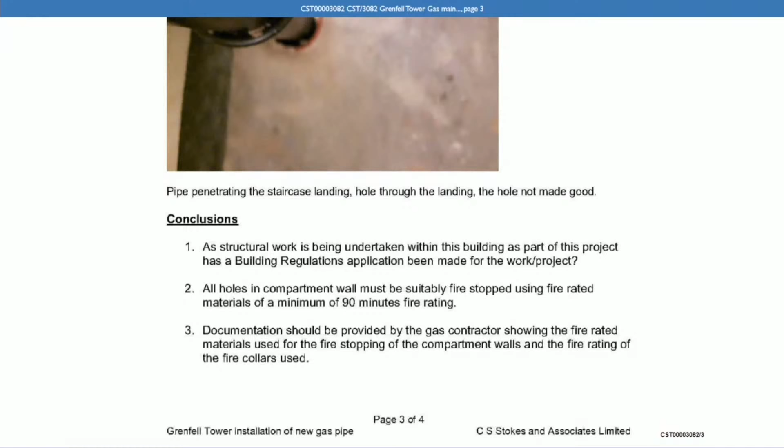Now, is it possible that there was a failure of communication between tRIIO and Carl Stokes on this point, in that he thought that all these holes needed to be fire stopped and didn't appreciate that part of the design left some of these holes open for ventilation purposes? That may very well be the case. I don't recall seeing this document myself, right, and whether or not it was passed to the designers at the time, or just to Miss Ray, and whether or not she passed that to us.

Yes, because certainly the photo we can see there on the screen, pipe penetrating the staircase landing, hole through the landing, the hole not made good. That comment, the hole not made good, perhaps suggests that he doesn't appreciate that there's got to be a hole around that pipe for the staircase to ventilate properly, hasn't there? That's exactly right, yes. Yeah.

Now, it was shortly after this exchange that the design was settled and agreed. If we can look at TMO 008289115. This is an email chain between tRIIO and the TMO on the 30th of November 2016, and if we can go within it to page 3, we can see there's an email from